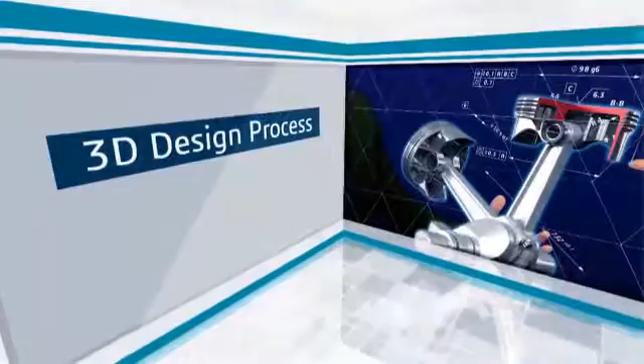Today, 3D is commonly used across the design process, but many companies are wondering why, despite their investment in 3D, they still suffer from errors and delays. The reason is, for many, 2D remains the master reference for the product definition. This is also the case for downstream deliverables.

Let's take a quick look at some of the business challenges that companies still using the 2D master approach are facing today. One example is quality. Here we see a wire harness which is too short and can't connect. This is common and was the story in a high-profile aerospace project where the poor fit on the wire harness jointly developed between multinational participants led to a hugely expensive recovery plan and delays to the program.

In architecture, it's not unusual to see absurd results realized in production based on what is described in the 2D drawings. A door blocked by another structure, or a staircase which leads to a dead end. Have you ever bought a car and after 6 months discovered the quality created is not sustainable in the midterm? In this case, a glove compartment does not close correctly because it was incorrectly designed.

And worse, of course, is safety. When quality impacts safety, there can be a tremendous danger and negative impact. A few years ago, we had a famous automotive example where a car failed an important evasive maneuver test, resulting in major modifications and redesign of the chassis in order to recover, and lost sales.

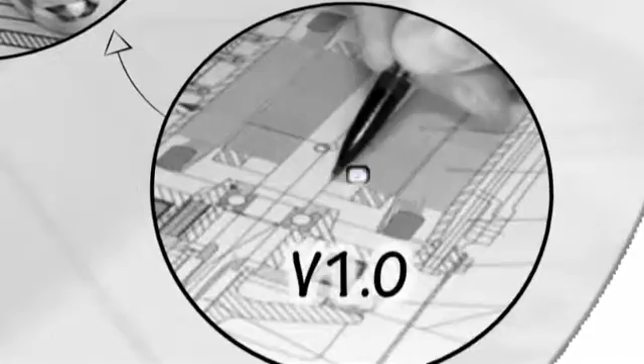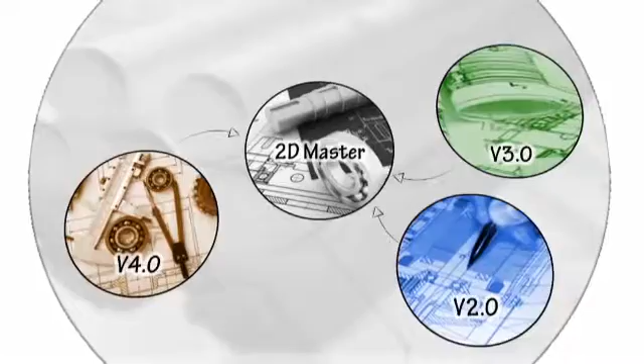So let's summarize the root causes of the negative impacts of the 2D Master approach. Starting a project with 2D Master, the project information is not simply a single piece of paper. It can come from multiple formats. So the challenge is, how do you work on data coming from different sources that might not be up to date or accurate? There's also no continuity among the stakeholders involved in decision making. The phases are manual and desynchronizing, causing breakage.

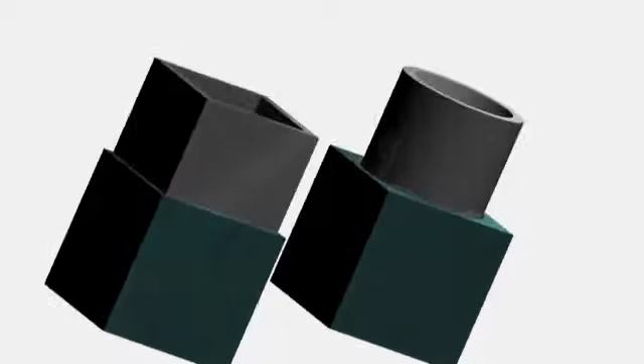And something very simple which is still missing, and businesses are spending lots of money on it, is the misinterpretation that drawings can deliver. A simple example here. Is it a diameter or is it an offset? In 3D, we have a cylinder or a rectangle structure, but the drawing is missing the information. How can you make sure your drawing is self-contained with all the information required to fully define the product? Today, there's no answer to that in 2D. 2D inherently has limitations on what can be shown. 3D brings completeness and precise definition.

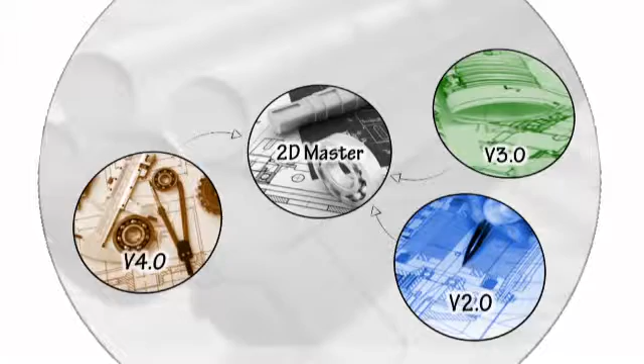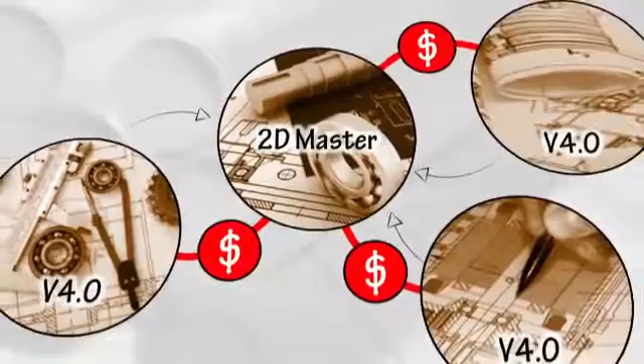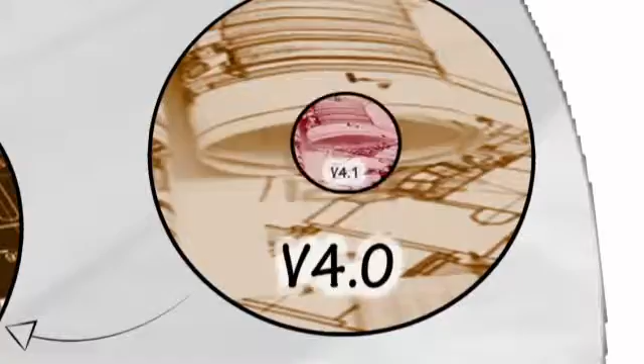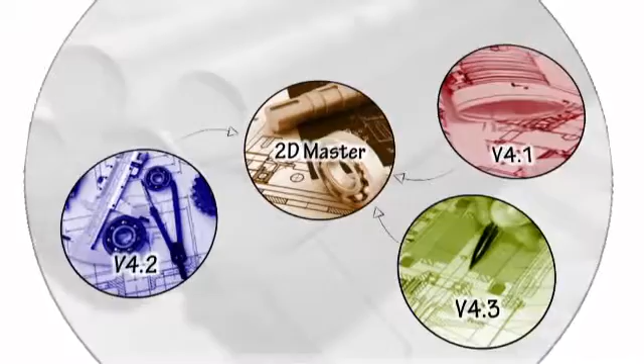And when you're working with lots of drawings in parallel, depending on the phase of the project, the cost of maintaining the integrity of these drawings during the change process is huge. If you manually change one drawing, it immediately becomes desynchronized from the original data. If someone then makes a change to the 3D model, the drawing's no longer aligned. So the cost of this lack of synchronization is huge. Often with a 2D master, all the issues aren't immediately identified, and the lifecycle costs are increased by the continued use of incorrect and unsynchronized 2D documents, leading to quality issues and customer dissatisfaction.

At Dassault Systèmes, we have developed a response to these challenges. We call this approach 3D Master. It provides companies with one single reference for 100% of the product definition, all in 3D. It means that there's a single source of all product information. It includes a fully accurate and annotated geometric definition. And this single source provides everyone with a source for all manufacturing and work instructions and all downstream processes, and a single traceable source for compliance with regulations and standards.

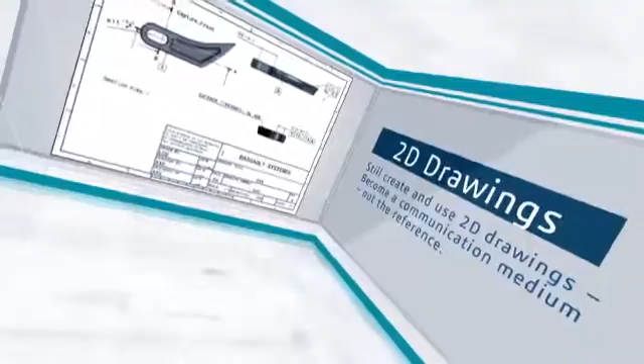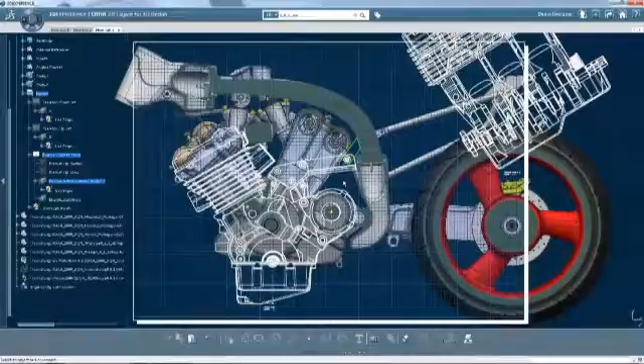You can still create and use 2D drawings, but they become a communication medium, not the reference, and they're always up to date. The benefit affects all phases of the product development lifecycle. In the conceptual phase, once you adopt the 3D Master approach, it becomes easy to reference and reuse existing 3D and 2D design data with the confidence that it's always correct and has not been modified in the detail drawings. New concepts in 3D can be quickly generated from existing 2D layout.

An important thing to remember is that 3D Master and Conceptual Design delivers flexibility to draw in 2D in the context of 3D, simplicity in importing 2D, and creating a model with associativity should any engineering change come, and you're beginning to prepare the single model definition created using multiple sources.

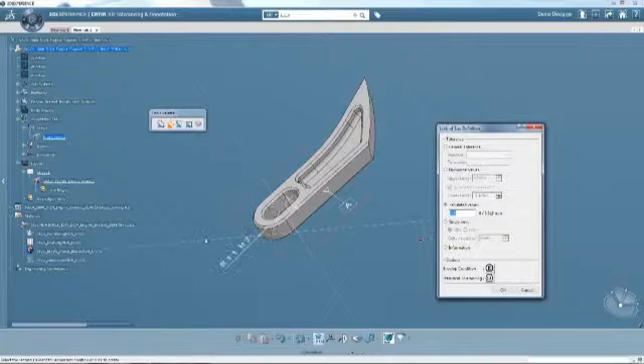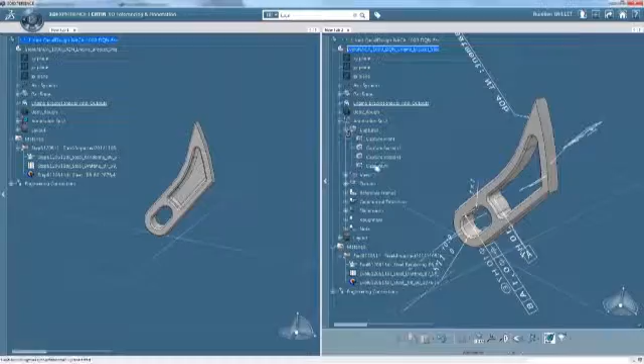In the detailed design phase, you can completely define the part with tolerances and annotations directly in 3D, making the definition more accurate and accelerating the development process. The Tolerance Advisor checks and proposes accurate and available solutions, so all information necessary to manufacture the part is captured. Tolerance schema can be rapidly applied to families or similar parts, saving time. And again, the Tolerance Advisor identifies and defines assembly conditions for a total product definition.

So what value are we bringing to the detailed design phase? First, we're improving the quality. We are working on 3D geometry, and there is no misinterpretation. Errors are identified early. Product accuracy is improved due to the 3D access. And one of the impacts of that is cost reduction. The model can be reused by any process, including reuse of the functional description among part families. In the validation phase, there is now a single source of all product information.

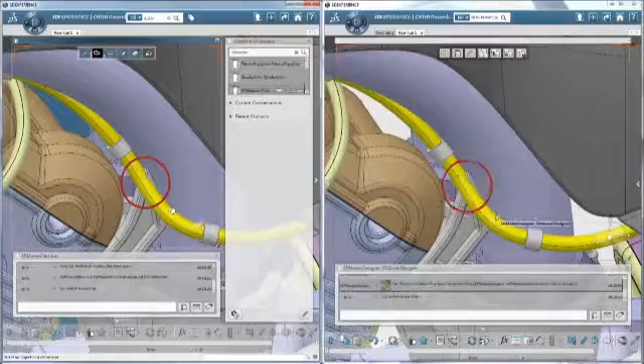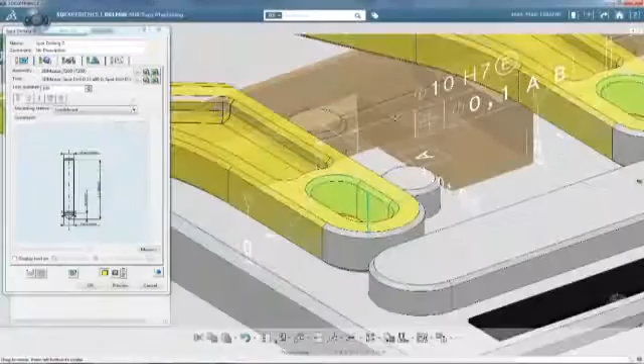Second, we support multiple disciplines. We also showed real-time concurrent design and review. And the result is decision-making, error detection, and error resolution are all dramatically accelerated. And downstream applications like manufacturing benefit from direct integration and access to the full 3D product definition. Toolpaths, for example, are generated on the exact up-to-date geometry.

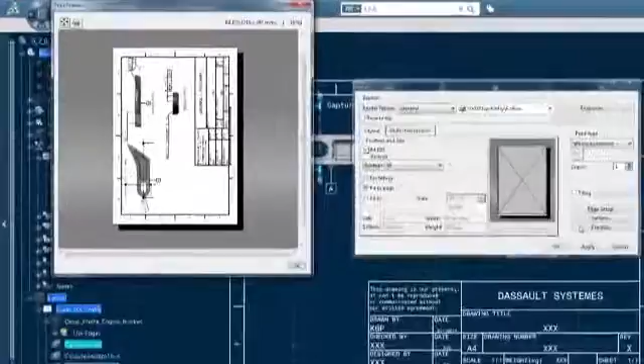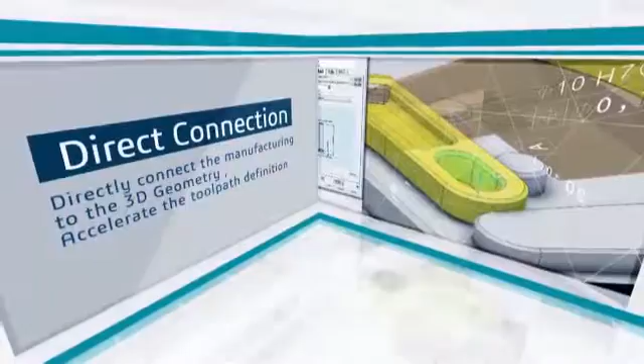Downstream users can create their own specialized views and improve their own decision-making, always with accurate data. On-demand blueprint generation allows documentation to be produced for suppliers or other parts of the organization. You can still create and use 2D drawings, but they become a communication medium, not the reference, and they're always up to date. So the value in manufacturing includes on-demand blueprint generation, and we can directly connect the manufacturing to the 3D geometry, referring to the semantic definition to accelerate the toolpath definition.

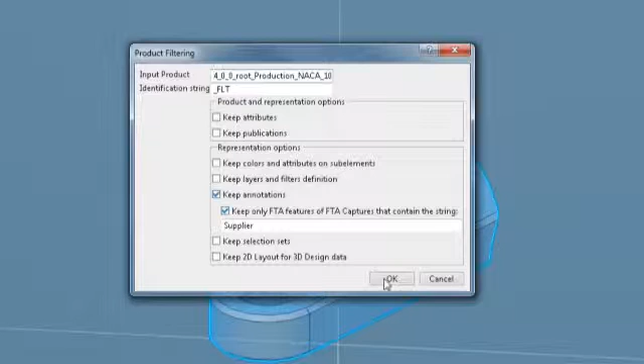In production and installation, 3D leads to a better understanding. Everyone can have access to the single definition of the product. There's a single, traceable source for compliance of regulations and standards. You can also filter the level of shared information, protecting your intellectual property when you exchange with suppliers and partners.

So again, 3D leads to better understanding and removes misinterpretation. Also, intellectual property can be protected by filtering what you want to export. And of course, everyone can directly access the single definition of the product. So now let's take a brief look at cases where our customers are improving their performance with 3D Master.

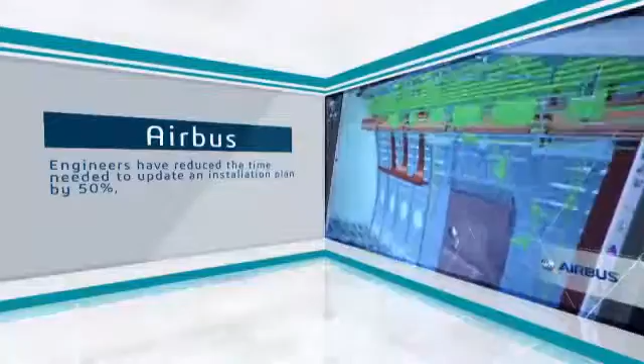Antoine Scotto, head of the PLM program for the A350 XWB at Airbus, said with CATIA, we implemented a full 3D Master approach to design the electrical harness installation, which simplifies the process and overall design quality. He also stated, engineers have reduced the time needed to update the installation plan by 50% and decreased the design change requests generated when creating manual 2D drawings by 25%. Everything was installed, fitted, and verified digitally, and if there were any errors, they were corrected before the physical installation.

Saab Aerospace is both an aerospace OEM and a major supplier. Using 3D Master, they've been able to achieve a reduction of 90% in change costs and have delivered 3D work instructions to the shop floor. Time spent creating the drawings is now a third of what it was previously. Ford has reached out to their extended enterprise with a communication recommendation to its supply chain to adopt 3D Master, targeting 500 plus suppliers. We've seen how 3D Master can lead to huge costs and productivity gains.

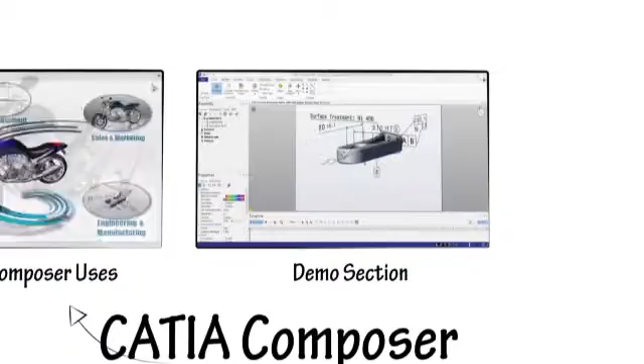Now let's take a look at how we can add CATIA Composer to the process and add even more value to your downstream deliverables. First, we'll take a very quick overview of some of the typical use cases for Composer. Then we'll go through a quick use case demo. Lastly, we'll do a quick summary and recap. Here in Composer, we're seeing an interactive presentation showing typical use cases for Composer. Sales and marketing is not only for this type of configurator, but for any time you'd like to interactively explain your product or present information.

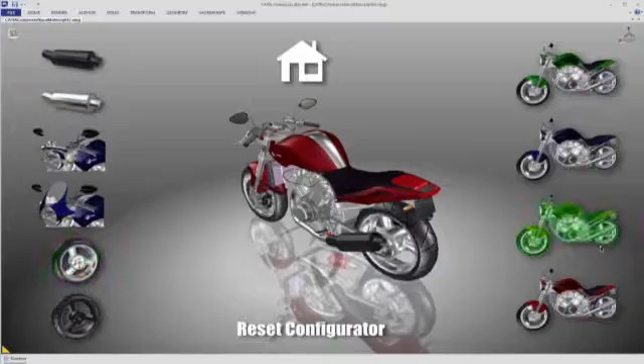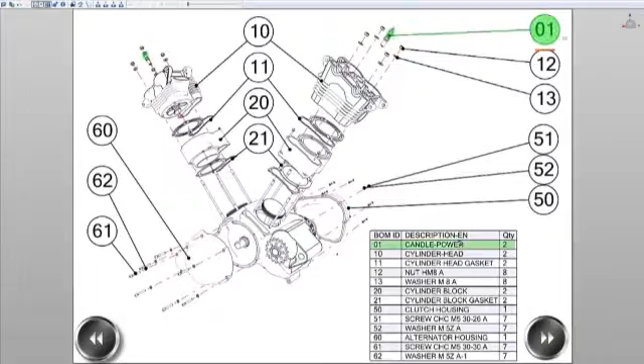In customer support and services, you could easily show a service procedure like this disc brake removal. Huge improvements in both quality and productivity have been experienced by our customers in technical documentation and manual creation, with speed and power in Composer in linking and creating interactive SVG documents. Now let's take a look at the engine bracket with the PMI that was created in CATIA as it relates to production engineering and quality assurance in Composer.

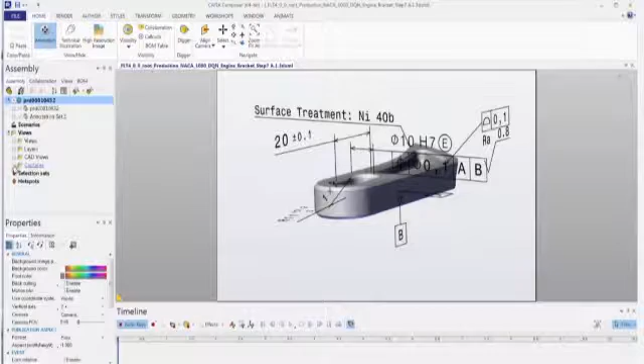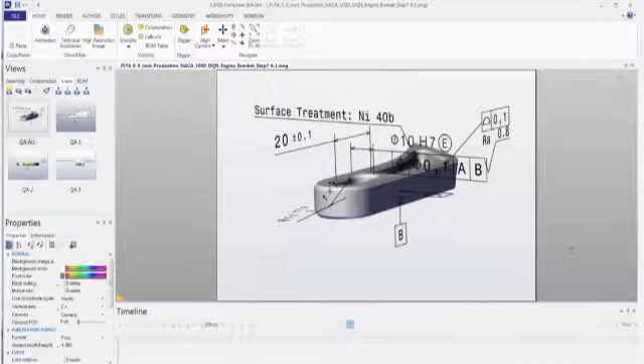We can see all the original PMI, and now we can create our own views and add any relevant information, or in this case, we can extract the captures directly from CATIA. After we save the Composer file, we can use the powerful Open XML architecture to make custom applications like this simple Excel sheet to aid in an inspection process. In this particular sample, we can browse a model and automatically populate thumbnail views so the user can quickly navigate to whatever view they want.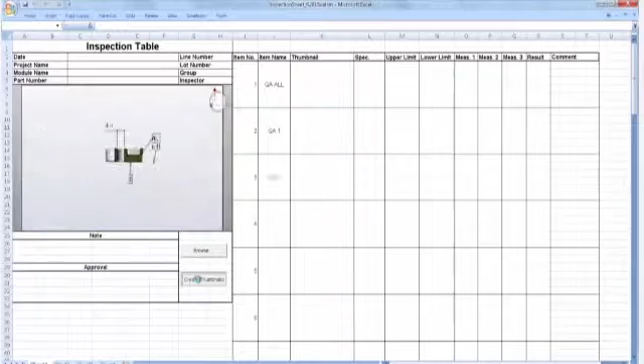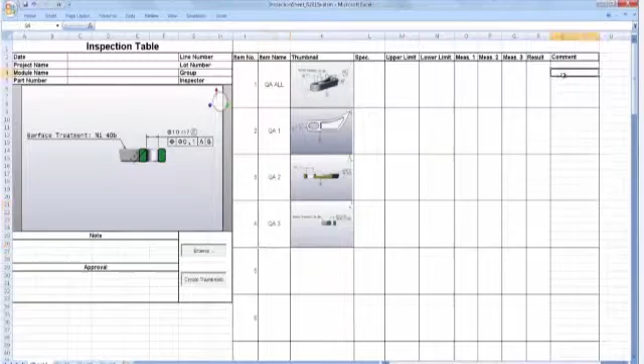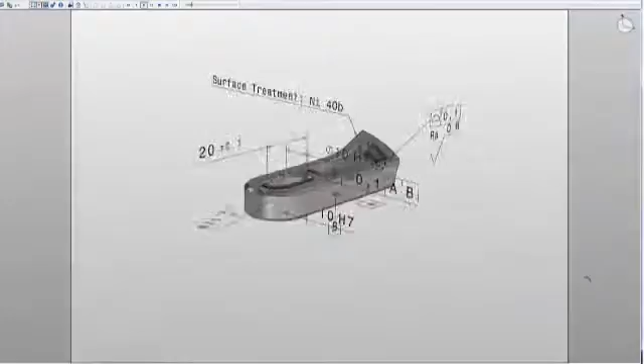They can then inspect and measure the actual measurements compared to the tolerance specifications without having to worry about out-of-date 2D documents. This way they can note the actual measurements and add inspection comments to complete the inspection. Now in Composer, in addition to the inspection and quality assurance on the bracket, engineering and manufacturing can have access to the same data, ensuring the fabrication procedures are followed using the correct measurements and very clear instructions without having to rely on confusing 2D documents.

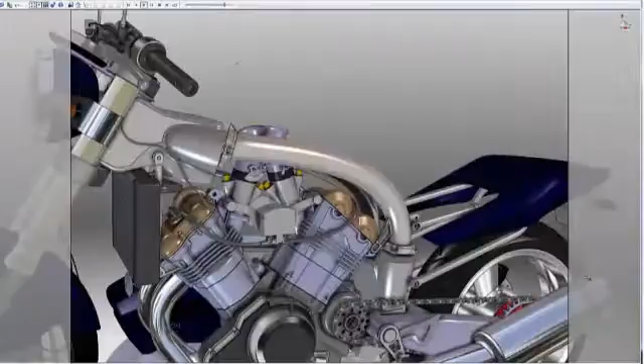This has been a quick glimpse of Composer with the advantage of the 3D Master PMI data. To summarize all we said during the presentation: first, we have access to the correct information anywhere, anytime. And the productivity improvement from information is critical.

Then, it's also a natural path to go from 2D Master to full 3D Master, and it increases product and process quality. The impact directly is cost reduction, and the savings achieved by customers are huge. Also, we're respecting the standards, and now more and more 3D is becoming a contractual data set. So the cost and quality are available for all who deploy.